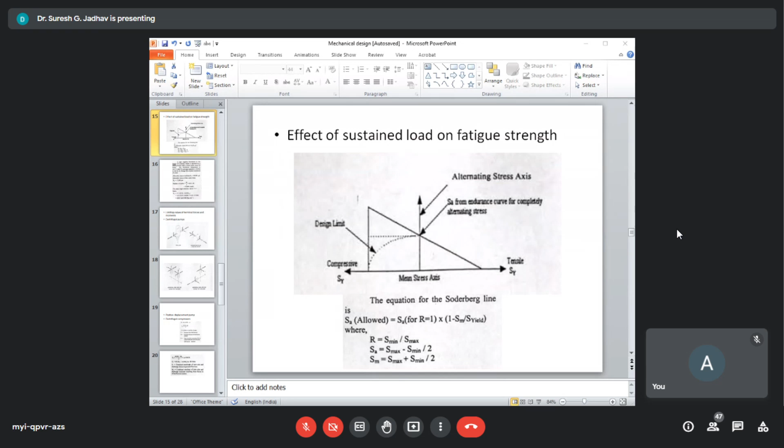So this value indicates different cycles, and the factor remains the same in both cases. Now let us consider a typical example.

For calculation of SA, that is allowable stress: here pipe supplies Dowtherm to the limpet of a reactor, which is operated on a batch process with a 4-hour cycle every 24 hours. System temperature is 315 degrees centigrade, and in Fahrenheit that is 600 degrees Fahrenheit, and the material is ASTM A106 grade B, design life of plant considered 20 years. So in this example we have to calculate the allowable stresses.

Now the first step is to consider allowable stress at ambient, that is 20,000 psi, and allowable stress at maximum metal temperature, that is SH, 17,300 psi. Now we have to calculate the number of cycles.

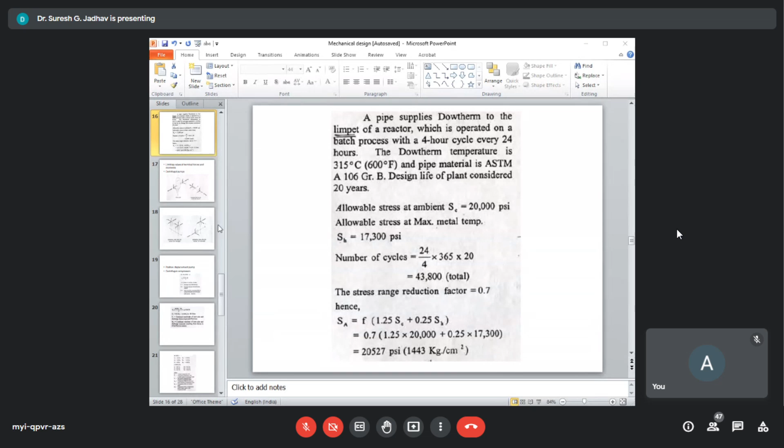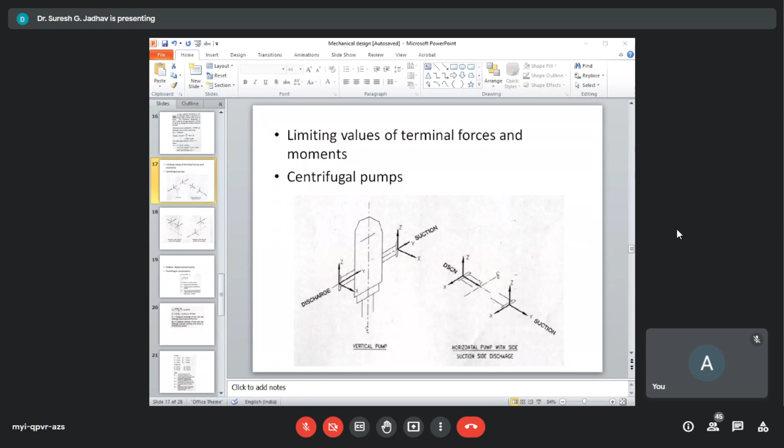Now see the limiting values of terminal forces and moments, and then centrifugal pumps. In limiting values of terminal forces and moments, it has been indicated earlier that in case of strain sensitive equipment, the main consideration for flexibility are the forces and moments which a pipe imposes on the equipment to which it is connected. The maximum permitted values of forces and moments will vary with the type of equipment. These are established by the regulatory codes based on which the equipment is designed or manufactured. Or else, the manufacturers of the equipment set these values to ensure safe operation of the equipment.

Then we have to consider the regulatory codes referred by piping engineers for different components like centrifugal pumps. In centrifugal pumps, we consider API 610 or ISO 5199. Second one is positive displacement pumps, that is API 676. Centrifugal compressor, API 617. Reciprocating compressors, API 618. Steam turbine, NEMA SM23, meaning National Electrical Manufacturers Association SM23. And the next component is air cooled heat exchangers, that is API 661 or ISO 13706. These are the regulatory codes referred by piping engineers when considering limiting values of terminal forces and moments.

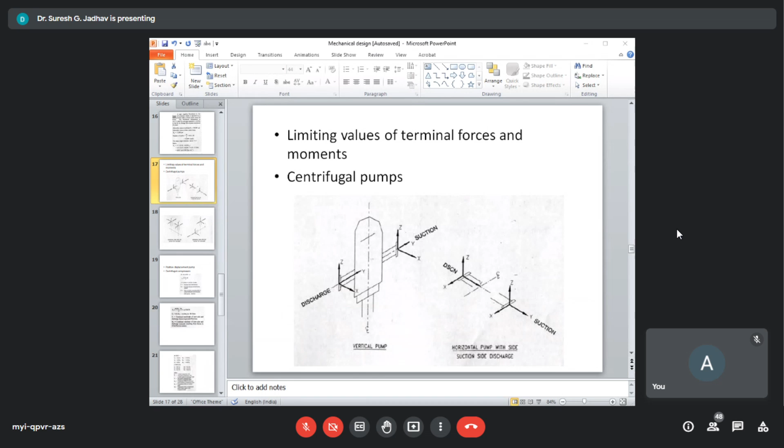Now, horizontal pumps with top suction, top discharge, and horizontal pump with end suction and top discharge. As per ISO 5199 of 2002, this gives the allowable value of forces and moments on the pump nozzles.

Now next is positive displacement pumps. The American Petroleum Institute standards, API 676, specifies in class 2.4 the limiting values for rotary positive displacement pumps with alloy steel or steel casing at inlet and outlets. We consider their forces and moment values, and their appropriate nominal diameter of the nozzles in inches. So as concerned the positive displacement pumps.

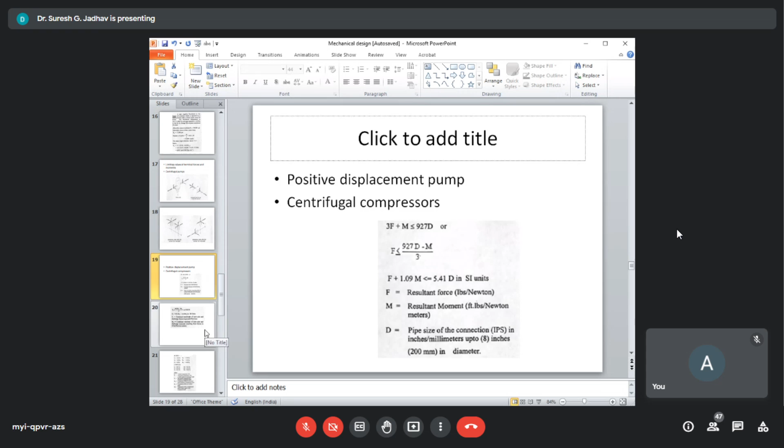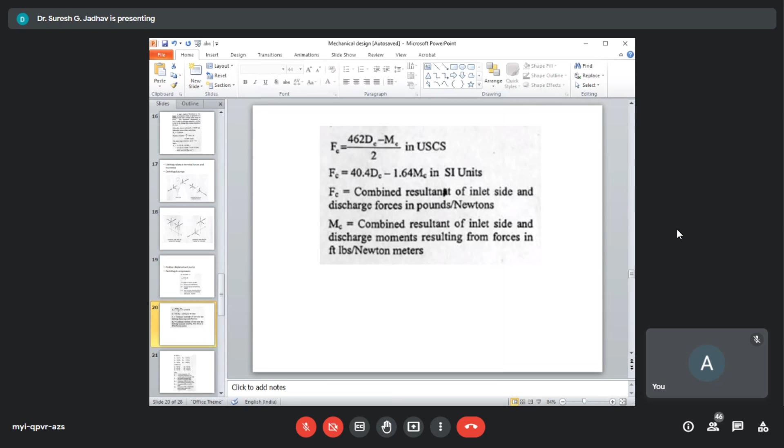Now we have to calculate the DC, the equivalent diameters to consider for this process in inches and millimeters. Then to consider the components of this resultant in US customary units and MKS units, forces and moments: force acting along the Y, Z, and X directions, and moments acting along the X, Y, and Z directions. Their respective values are given.

For the forces, we consider the force acting along the Y direction, that is 231 DC, F of Z 185 DC, F of X 92 DC, and the respective moments: M of X is 462 DC, M of Y is 231 DC, and M of Z equals 231 DC.

And in MKS units, values are given for F of X, F of Y, and F of Z, forces acting along the X, Y, and Z directions, and likewise moments for the X, Y, and Z directions in MKS units.

Here F of Y is the vertical component of Fc, and F of Z is the horizontal component of Fc. You can see the forces here: F of Y, the vertical component of Fc; F of Z, the horizontal component of Fc; and F of X, the horizontal component of Fc parallel to the compressor shafts.

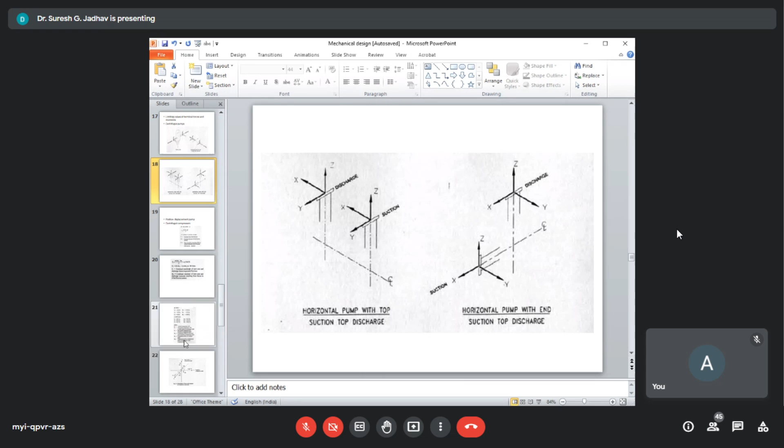And to consider their values for moments: M of X is the component of Fc in a horizontal plane parallel to the compressor shafts, M of Y is the component of Fc in the vertical plane, and M of Z is the component of Fc in the horizontal plane at right angle to the compressor shafts.

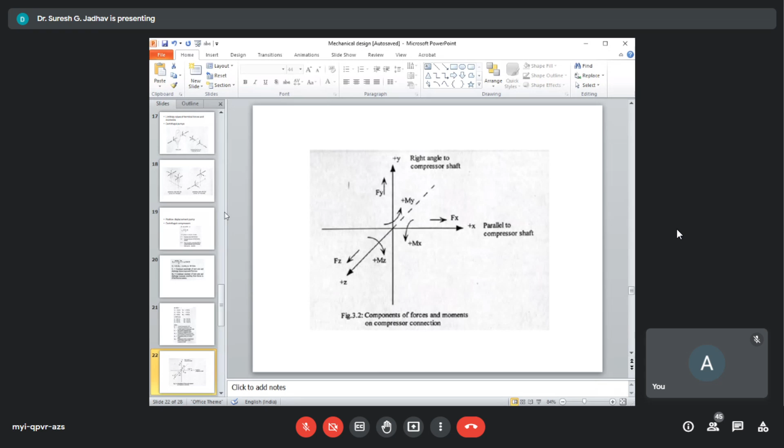So these components of the resultant shall not exceed the values as per ASME code 31.3, and we have to consider the plan and elevation.

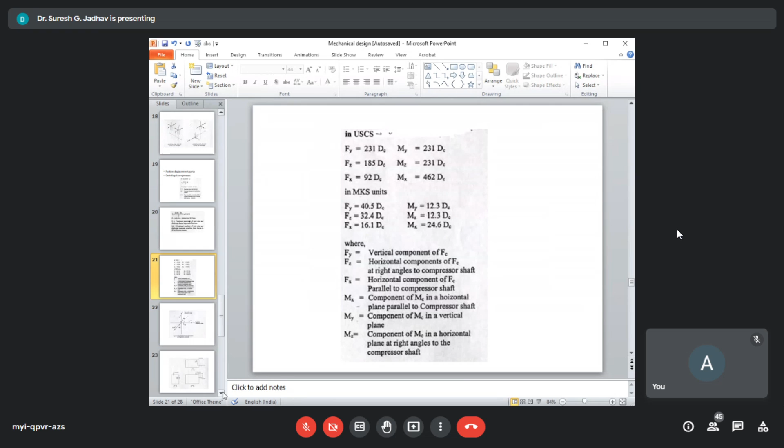Based on this, we consider the respective values acting in different directions: X direction, Y direction, and Z direction.

These values of allowable forces and moments pertain to the compressor structure only. They do not pertain to the forces and moments in the connecting pipings, flanges, and flange bolting, which should not exceed the allowable stress as defined by applicable codes and regulatory bodies.

Forces on the inlet connection are to be transferred along with the moment to the discharge connection to analyze the compressor for resultant forces and moments. But the transfer of forces will generate additional transfer moments, which are added to the total moments to give resultant moments.

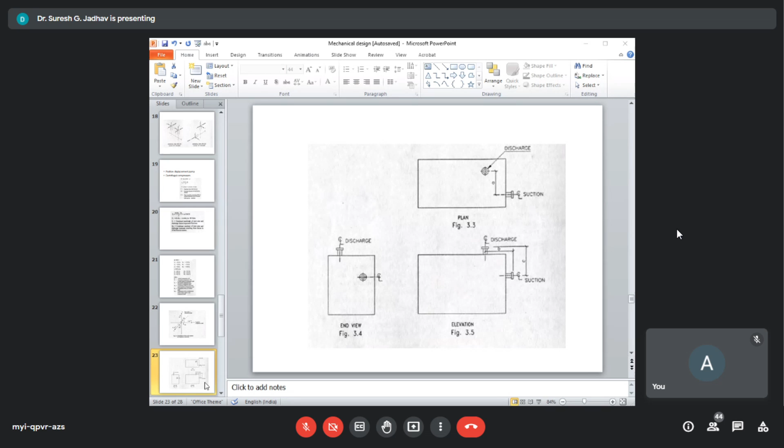So that concludes the centrifugal compressors. Now let's see the reciprocating compressors.

As per API, American Petroleum Institute 618, reciprocating compressors for general refinery service do not specify a limit on the allowable forces and moments in the code. The vendor shall specify the forces and moments for each nozzle in different tabular forms. However, the values as per API 610 can be considered for guidance. So that concludes the reciprocating compressors.

Now next is the steam turbine. As per NEMA SM23, requirements state that the forces and moments acting on the turbine due to steam inlet, extraction, and exhaust connections should be evaluated by a simple set of forces or moments calculation, similar to centrifugal compressors. This computation we can discuss now.

The total resultant force and the total resultant moment imposed on the turbine at any connection should not exceed the values as per this equation: 3F plus M less than 500D, or F less than 500D minus M over 3. Here F is the resultant force, including pressure force, where unrestrained expansion joints are used at the connection, except on vertical exhaust. Full vacuum load is allowed on vertical down exhaust flanges.

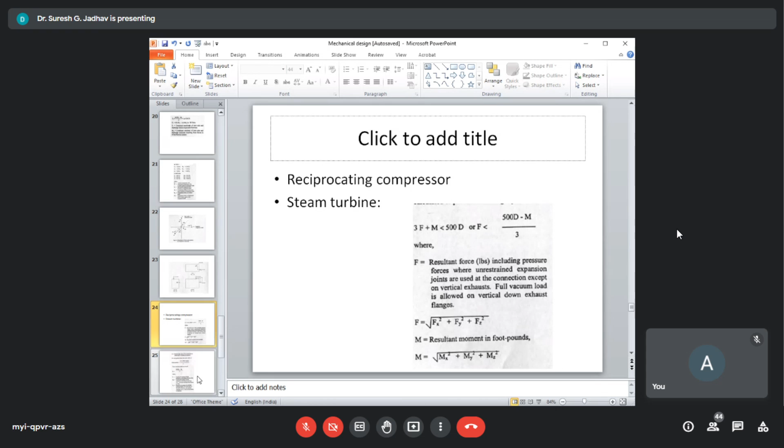So up to 8 inch for size greater than, we can use diameter equals to 16 plus IPS in inches over 3. Then we have to consider the combined resultant of the forces and moments of the inlet, extraction, and exhaust connection resolved at the center line of the exhaust connection should not exceed F of C equals to 250 DC minus MC over 2, where F of C is the combined resultant of inlet, extraction, and exhaust forces in LBS, and M of C is combined resultant of inlet, extraction, and exhaust moments in foot LBS. Now DC is diameter of circular opening equal to the total area of inlet, extraction, and exhaust opening, up to 9 inches in diameter.

So we consider this value for the diameter of a circular opening equal to the total area of the inlet, extraction, and exhaust openings.

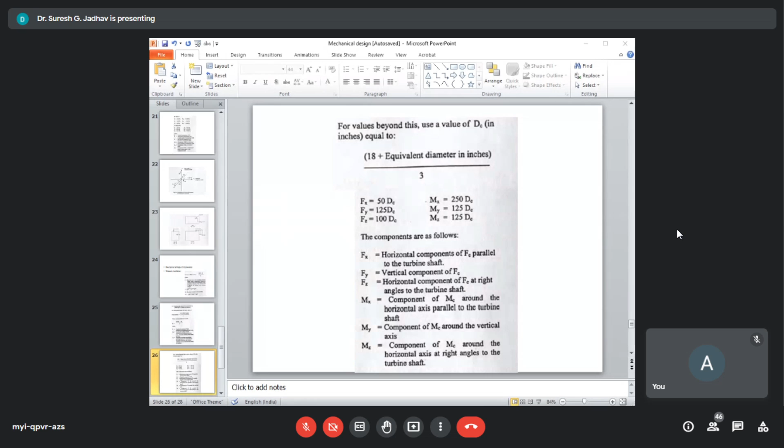Now for values beyond this, we can use DC, that is 18 plus equivalent diameter in inches over 3. Then we have to consider the component of this resultant should not exceed F of x equals to 50 DC, F of y equals to 125 DC, and F of z equals to 100 DC. As concerned with moments, M of x equals 250 DC, M of y equals 125 DC, and M of z equals 125 DC.

What is F of x? It is the horizontal component of F of c parallel to the turbine shafts. Earlier we considered the compressor shafts. Now F of y is the vertical component of F of c, and F of z is the horizontal component of F of c at right angle to the turbine shafts. As far as the moments are concerned, M of x, M of y, and M of z are the components of M of c around the horizontal axis parallel to the turbine shafts, M of y around the vertical axis, and M of z around the horizontal axis at right angle to the turbine shafts.

For installation of turbines with a vertical exhaust and an unrestrained expansion joint at the exhaust, an additional amount of force caused by pressure loading is allowed. This additional force is perpendicular to the face of the exhaust flange and is deemed to act at its center. For this type of application, calculate the vertical force component on the exhaust connection excluding pressure loadings, and compare this with 1/6 of the pressure loading on the exhaust. Use the larger of these two values for the vertical force component on the exhaust connection.

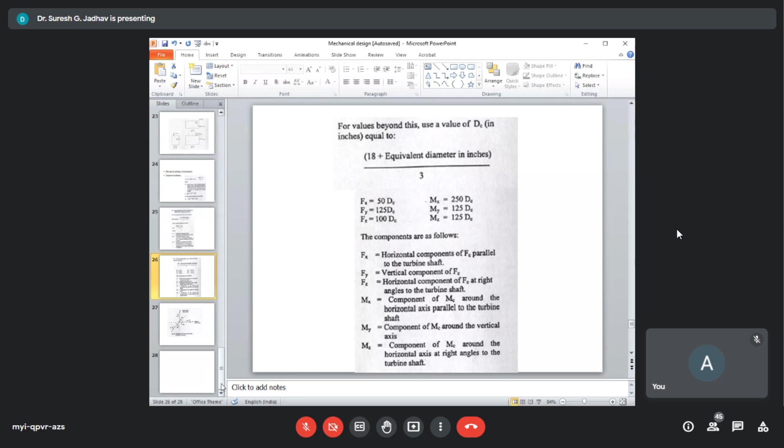These values of allowable forces and moments pertain to the turbine structure only. They do not pertain to the force and moments in the connecting pipings, flange, and flange bolting, which should not exceed the allowable stress as defined in applicable codes and explanatory notes in ASME B31.3. Therefore, we consider the respective component forces and moments on turbine connections.

So this is all about the steam turbines. Any doubts or any questions from your side?

Yes. Ravi, Praful, Prajakta. No, sir, no doubts. Okay, Pratik. No, sir. Okay, Ash, Aditi. No, sir. Okay, Aditi.